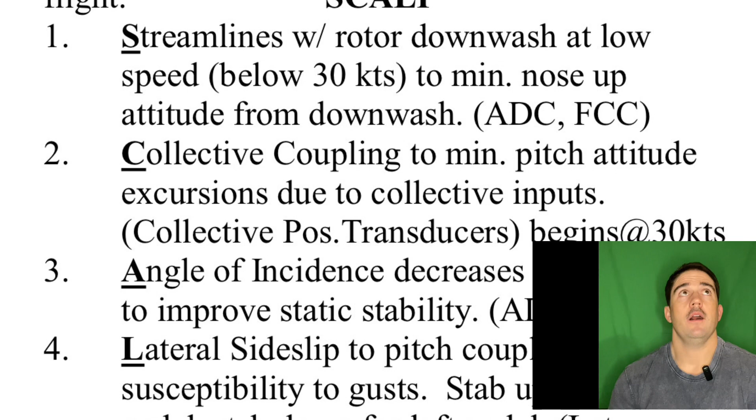So today we are going to dive in the functions of the Stabilator on the UH60. So if you've never been asked what the Stabilator is, it's only a matter of time before you will be asked what the Stabilator is. And if you haven't already studied the Stabilator, we break it into an acronym called SCALP. So SCALP stands for Streamlines with, Collective Coupling to minimize pitch attitude excursions, Angle of incidence decreases, Lateral side slip to pitch coupling, and then pitch rate feedback to improve dynamic stability.

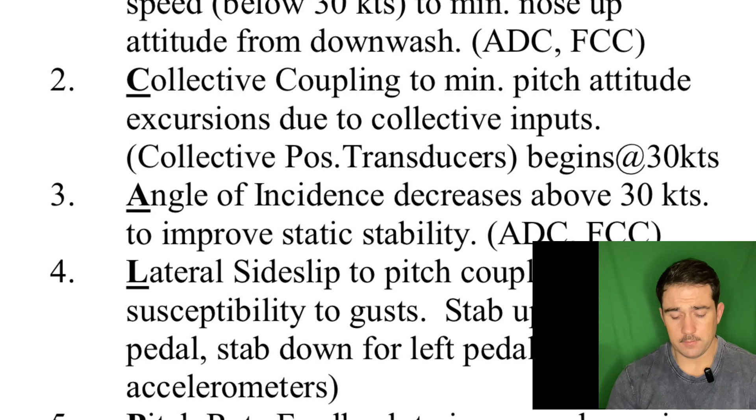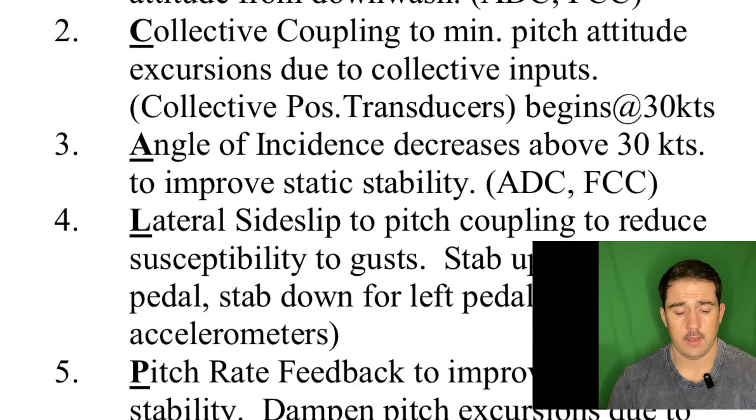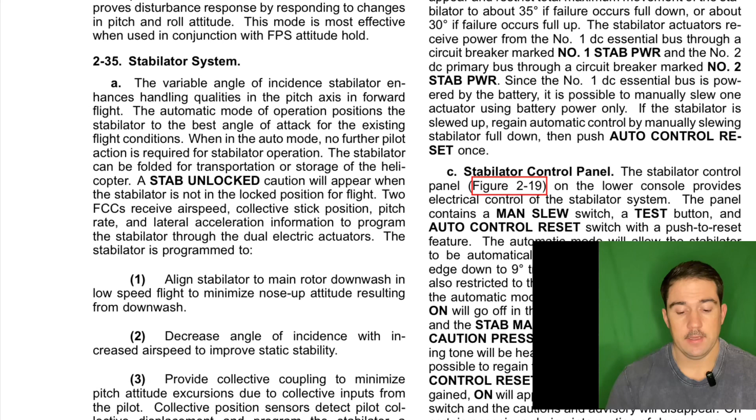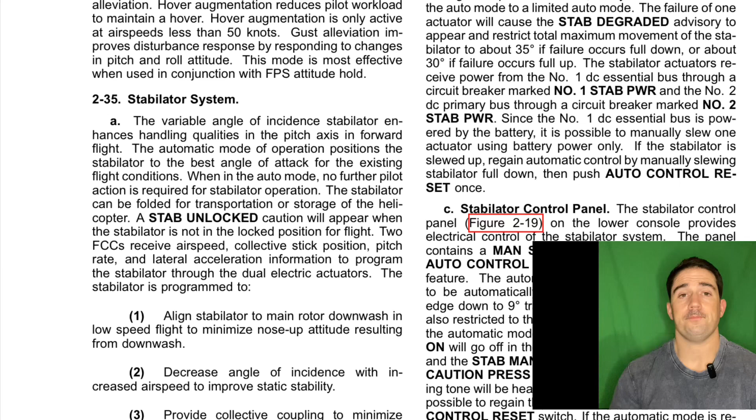But what does that actually mean, right? And today I'm going to try to get into that and break down a lot of those terms I just said. If your IP ever asks you, what is the Stabilator, or what does the Stabilator do for the aircraft, the Dash 10 has a very simple definition, and I'll read it straight out of the Dash 10. So it says, the variable angle of incidence Stabilator enhances handling qualities in the pitch axis in forward flight. Plain and simple, that is the definition of what the Stabilator does.

Most IPs want more than that. They'll typically go, oh, okay, good job, that's what I was looking for. But just like any IP, they will typically prod for a more deeper level of understanding. So let's get into the first one.

Going to be the S. So that is streamlined with rotor downwash. So the best way to describe this is when you are at low speeds, below 30 knots, or at a hover, the stabilator will be like this to streamline with the rotor downwash coming down. So it will go with the downwash rather than against it.

If it were to program up and the downwash were to be coming straight down on the stabilator, it would be more like a paddle, which would cause like an extreme nose up attitude. So if you were hovering and that stabilator was like a paddle and it was flat instead of streamlining with, your attitude would look like this rather than what it actually looks like, which is more like that in a Blackhawk.

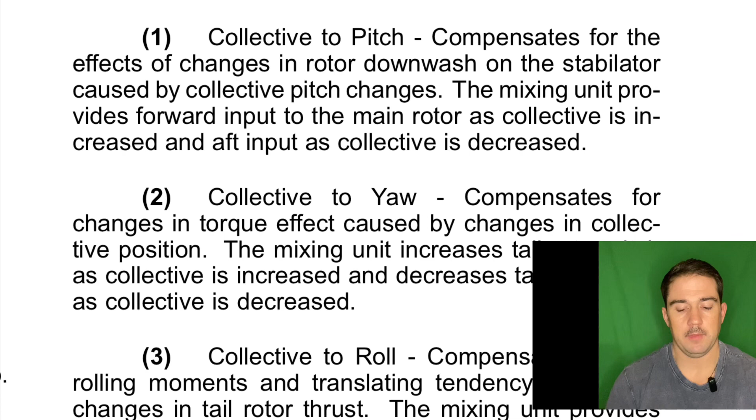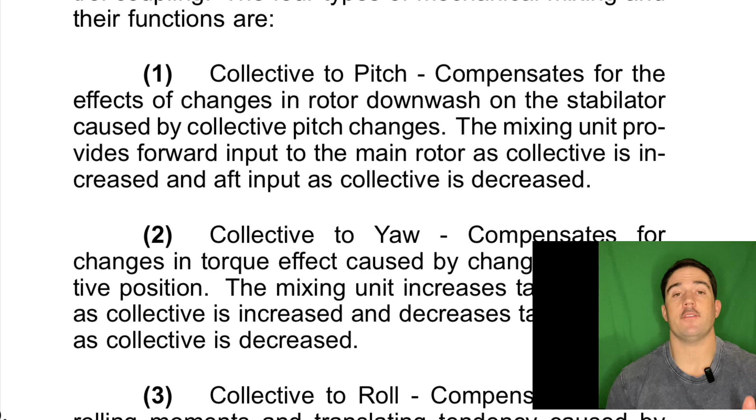Collective pitch mixing compensates for the effects of change in rotor downwash on the stabilator caused by collective pitch changes. The mixing unit provides forward input on the main rotor as collective is increased and aft input as the collective is decreased.

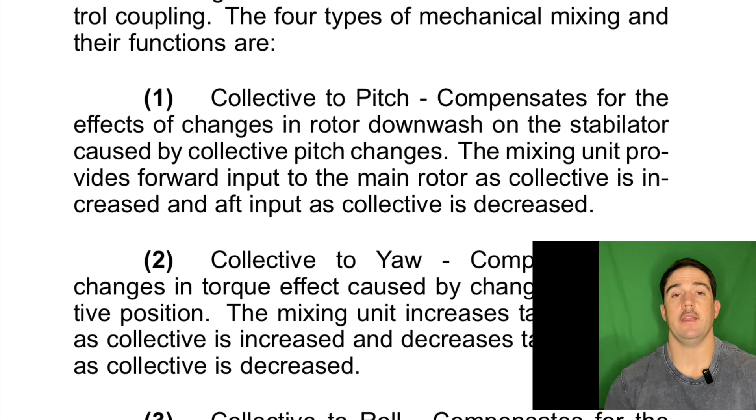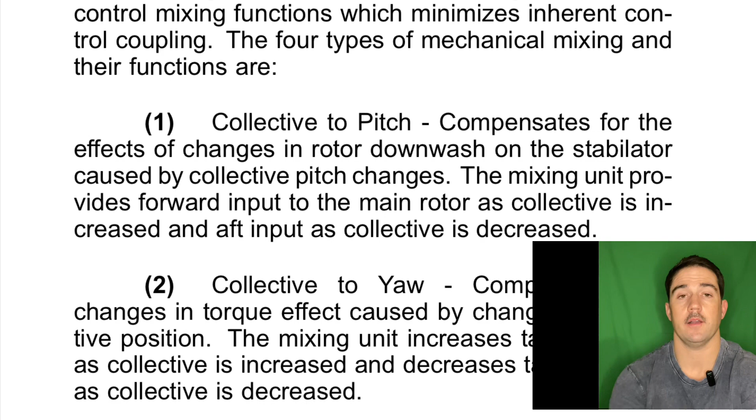So what that basically means is it's very similar to streamlining wing. The major difference is this one is talking about when you are at speeds above 30 knots, whereas streamlining wing is at hover flight or slow flight below 30 knots. The collective coupling is above 30 knots.

The best way to describe this function with an example: if you were flying at a high rate of speed in level flight and there's a piece of terrain in front of you that you want to go over. If you're flying at stable flight at a high rate of speed, your stabilator will be programmed between here and here, but it's not going to be here.

But if you pull in that collective to get over that piece of terrain, or for whatever reason you're pulling in power, the aircraft is going to send a signal to the stabilator that you're pulling in power, and it's going to go from being like that in level flight to being more like that. That way, when you pull in more power and cause more pitch in the main rotor disc, that extra downwash isn't going to cause the aircraft to pitch up, because it's going to be more streamlined with the aircraft. That is the best way to describe collective coupling.

The next one is a pretty easy one: angle of incidence decreases as your speed increases. Again, my iPad is the stabilator, and it's programmed just like this at hover flight or low speed flight. This represents your angle of incidence. The air is coming in and it is acting on the stabilator here, because the stabilator is more focused on the downwash at low speed rather than the incoming air.